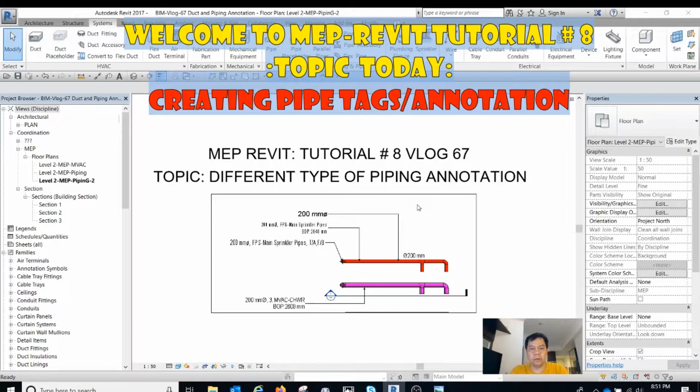My MEP tutorial is about the different types of piping annotation. This is tutorial number 8, and this becomes vlog number 67.

So this is my sample model for the piping, showing the different types of annotation.

First is the default annotation from Revit, and this is the modified piping annotation. I have 4 types: 1, 2, 3, and 4.

The first one is only the piping system. The second one is the piping system with the system type and the elevation.

The third one is only the piping with the annotations of to above and from below. And the last one is the annotations with the elevation including the pipe insulation.

This one is with insulation. Okay, let's start.

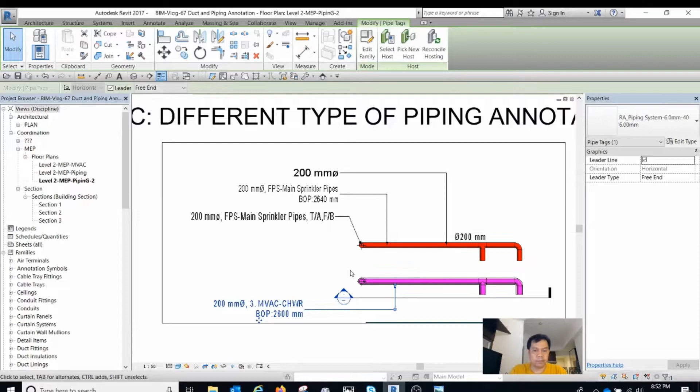We will use this piping model. This model is under the piping coloring system, already discussed in, I think, tutorial number 6 under vlog 65 or 64, I guess.

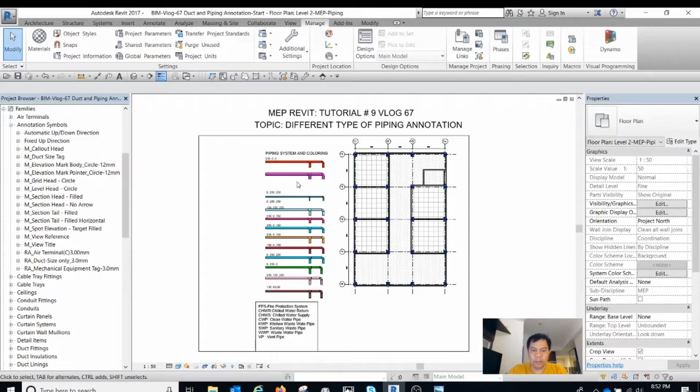And then this is our sample for creating the piping annotation. So in order to create the piping annotation, we will first create the floor plans for the piping annotation.

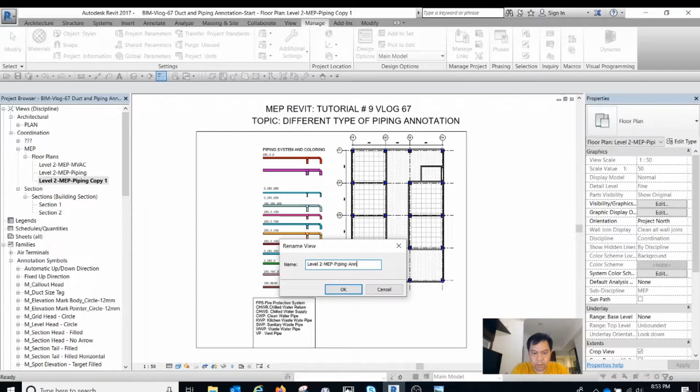Just duplicate with detailing, rename it, and do that from here. So we will delete this one.

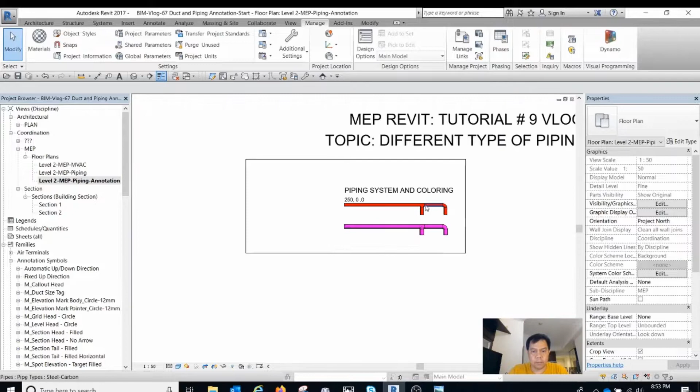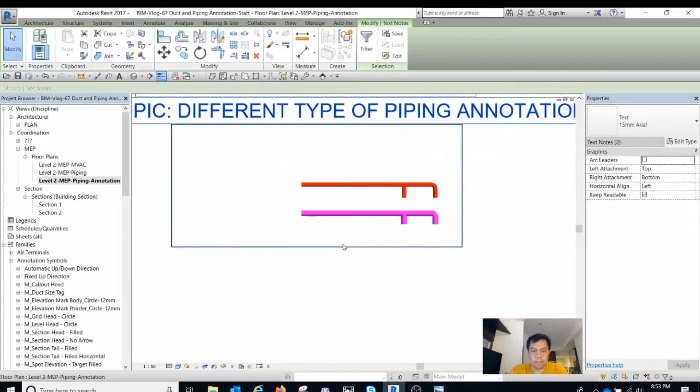Okay, let's start. Type TG to create the piping annotation. As you can see, if you type TG, there is no loaded annotation tag.

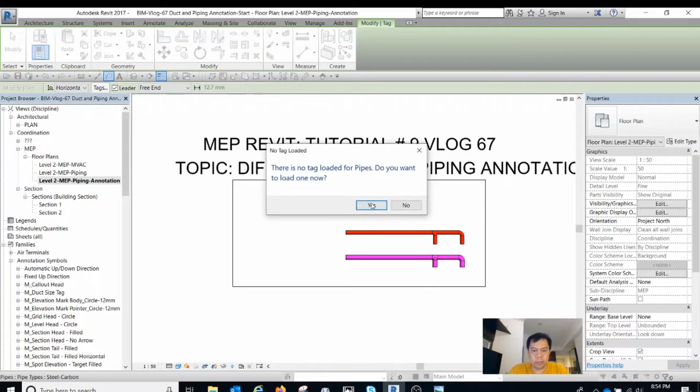So if we want to load the annotation tag, we will click yes, and then after that we will look for the metric annotation, look for the mechanical pipe size tag, and then it's okay already.

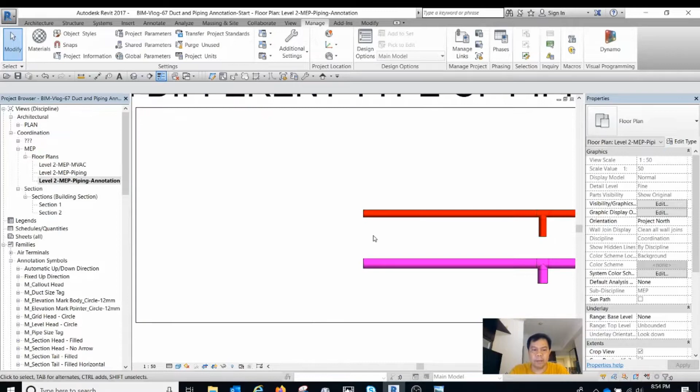Okay, since we already loaded the mechanical pipe tags, type TG again, and then pick from here to here. This is the default pipe size annotation, pipe size tag annotation. This is the default one.

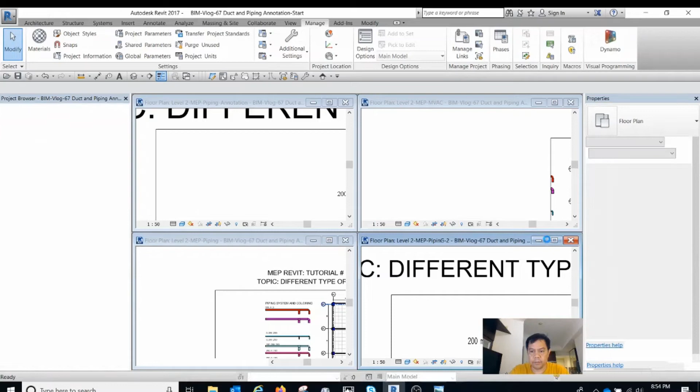We will modify this pipe size tag according to our text height. The text height is about 6 mm.

Here you can edit and modify this pipe size tag. Just click and then edit family, type VG, show the reference plane and reference line, click apply, okay.

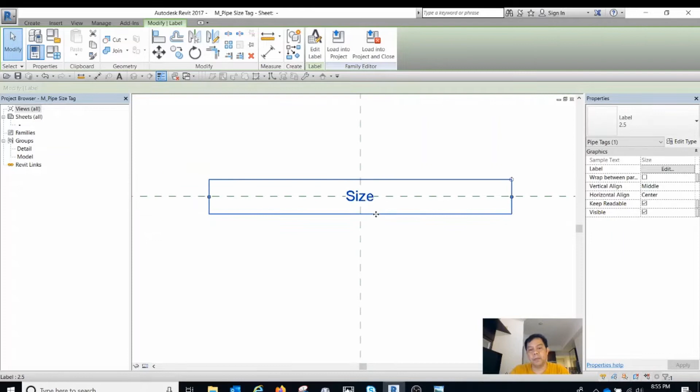We will first create the pipe with the bottom with the elevation from here, click and then edit. After that, click the diameter, one diameter, and then add parameters label. So it must bring up the system type.

Then the comments. The comment field is where you can input the description or additional information from the piping. Looking for the comments, okay here. And then bottom of pipe - I think we don't need the size parameter because we already have the diameter. If we choose the diameter, you can modify the size of the ducting, so we remove this one. But the bottom of pipe is missing here. We want the same like this, we want the bottom of pipe here.

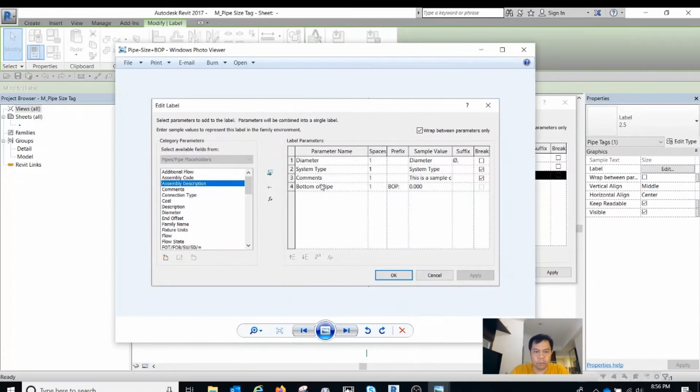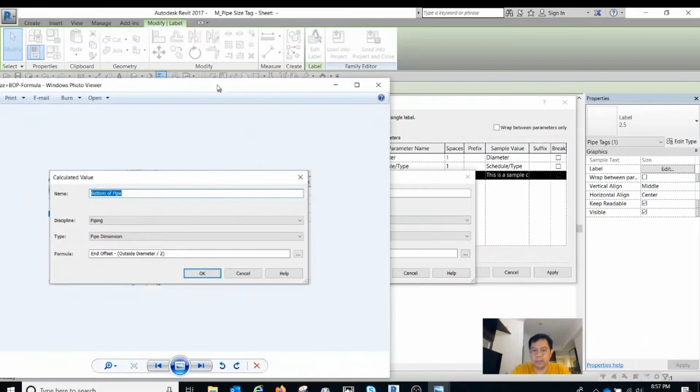But if you look for the category parameters, you cannot see the bottom of pipe. So we will create the bottom of pipe by clicking the add calculated parameter to label, just click, then bottom of pipe. This is very, very important. And then under the discipline, I have a sample here - the discipline is piping and the type is dimension. This is the formula, okay.

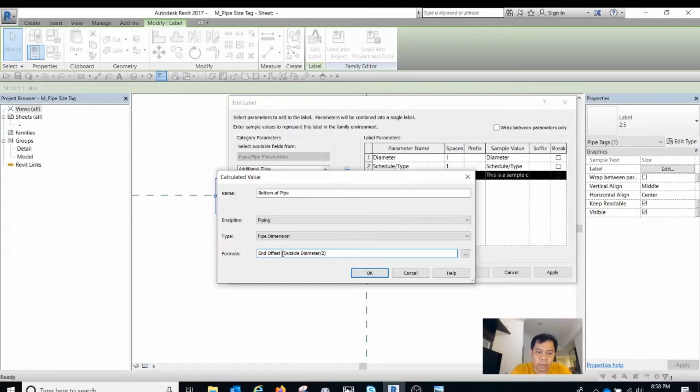So from the discipline type, choose piping, type choose pipe dimension, and then the formula is end offset, end offset minus outside diameter, divided by 2. This is the formula to create the bottom of pipe. Apply, okay, just okay, and then apply.

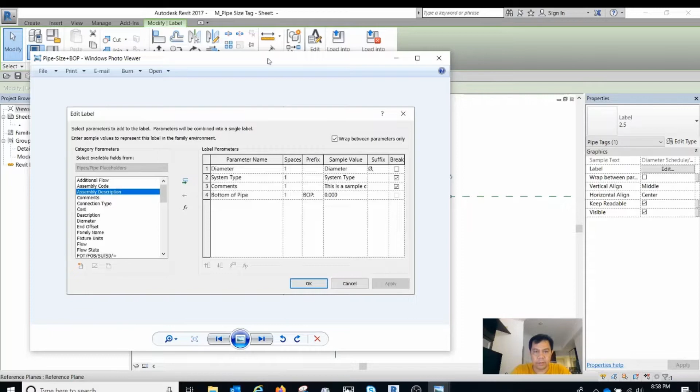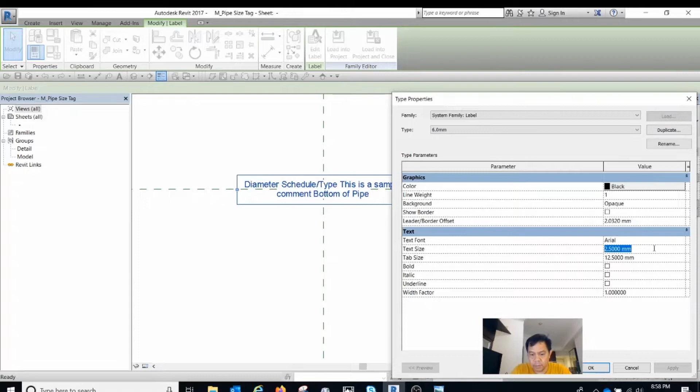Okay, now the type is like this, so we must create the arrangement. We will arrange the arrangements of the pipe according to - there is a break here, number 2 and number 3. So from here we will change the text height, must edit, duplicate, then 6.0, we will change into 6 mm. So 6 mm, usually Arial Narrow, and then the width factor 0.8.

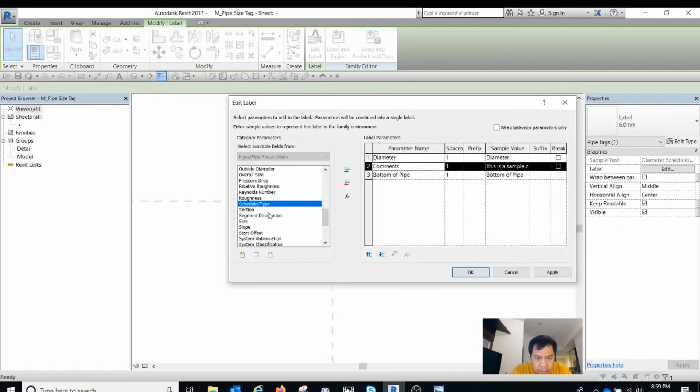Now the sample - so from this one we must break the system type and comments. So edit label, and then there is no system type here. It should be this one, system type. We will change the system type here, and then up here - diameter, system type, comments - and then check the system type and comments. Check the break. Apply, okay.

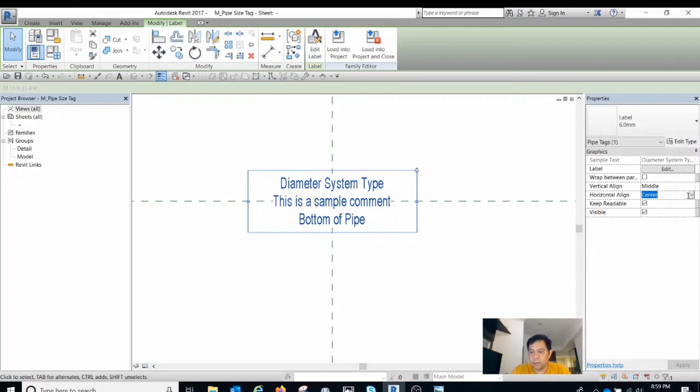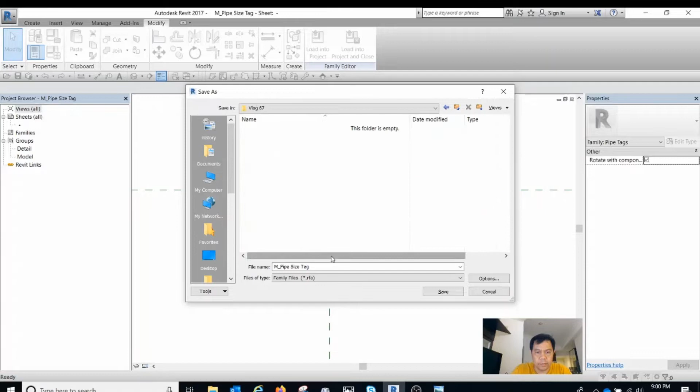After that we choose this one to left or right, I think we will use the right. Okay, after that, save as. I think this one, it's up to you what should be the file name. Then 6.0mm, option 1. Now we go, after that, load into the project.

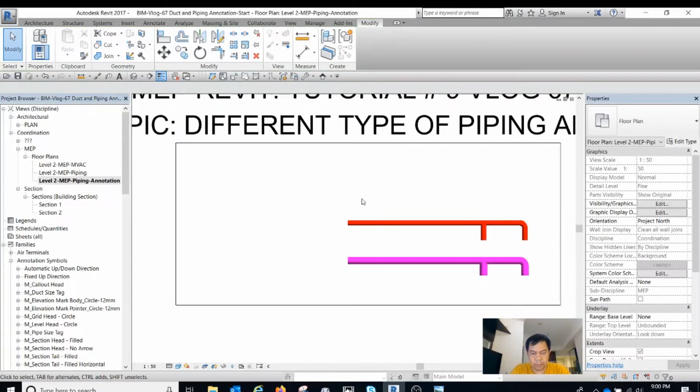Parameters here. It is already loaded, but our piping annotation from here - okay now type TG again. Sorry, type TG, and then from here to here. Now the piping system annotation is already complete, but there is a missing BOP here.

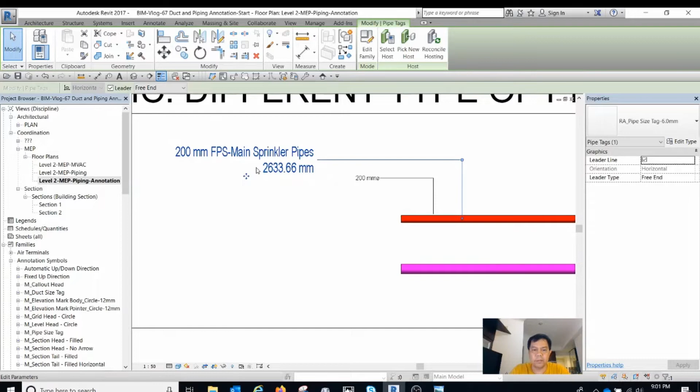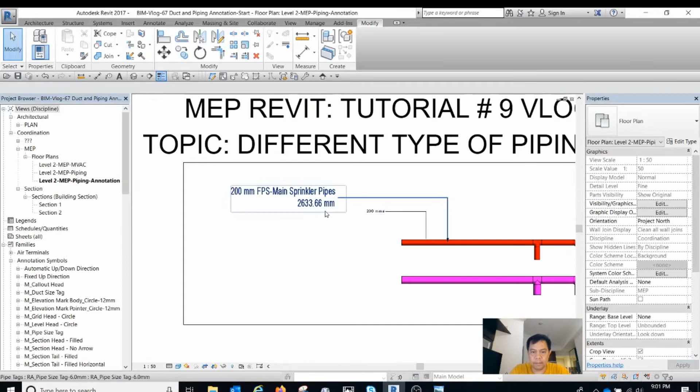But before we do that, we will add the arrowhead, 30 I guess. Okay, so in order to include the BOP, this one with the BOP, back again from here, edit family, edit label, and then we must add the BOP here, meaning bottom of pipe. Apply, and then from here again we must create this one for the diameter.

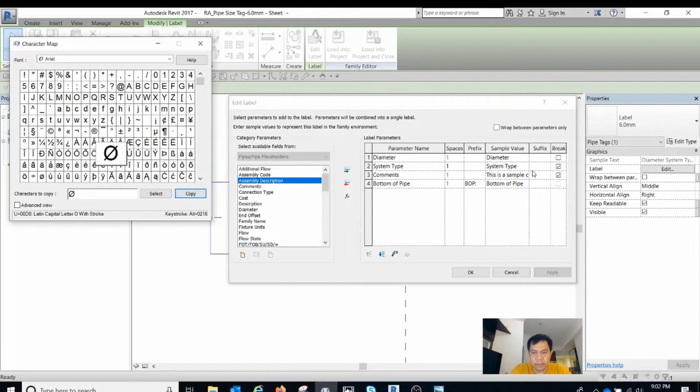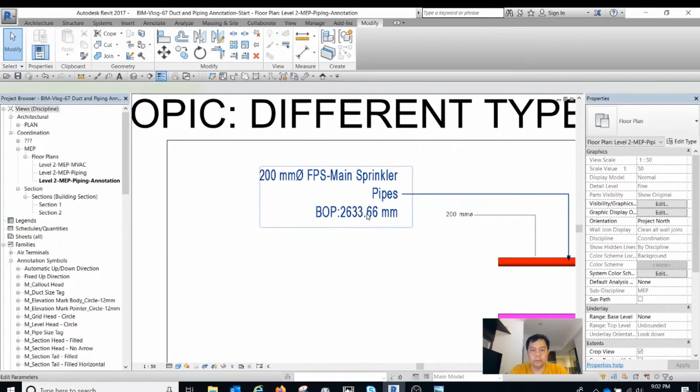So how to create the diameter? From the character map you can copy here, select, copy, and then Ctrl V. Okay, and then load into the project. Okay, I think we must arrange the - because this one is sprinkler, but the box is not properly arranged. From here, load again.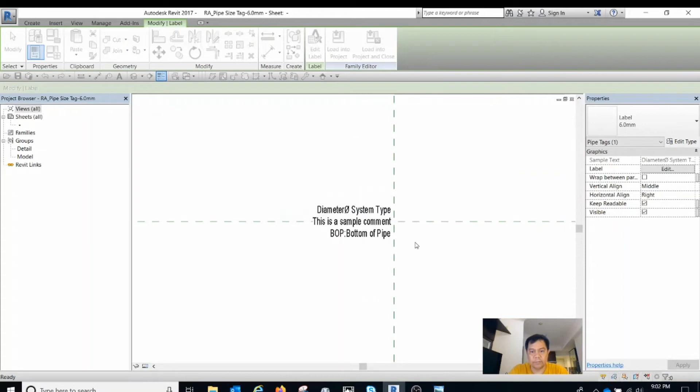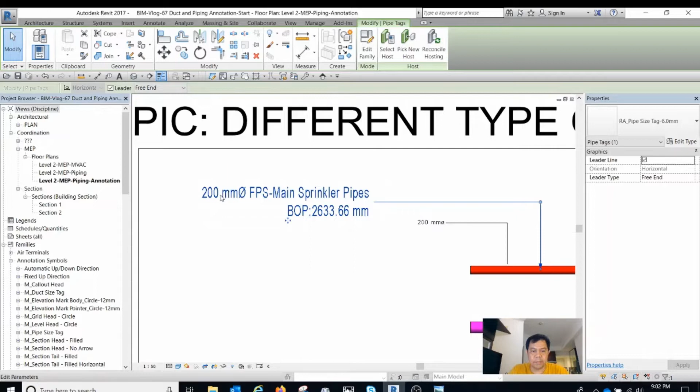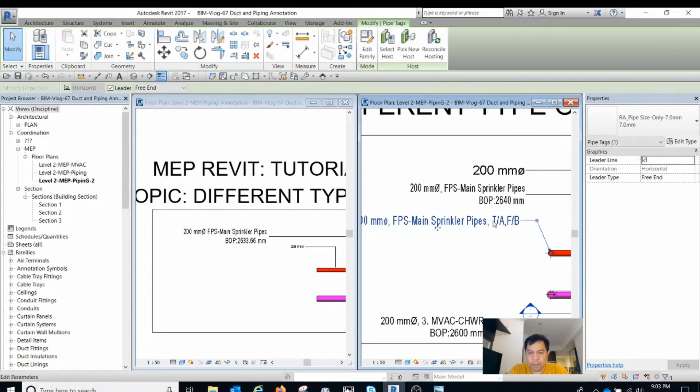Alright, oh see, now we have the bottom of pipe. This is the pipe size, and this is the system type with the BOP. So next is the bottom pipe size only - this one is only the pipe size. So we can now delete this thing, this is the default one.

Okay, from here again, edit family, and then save as first, family, and then this one is RA - it depends on you what is the file name. So this one we will make additional information, this one is pipe only.

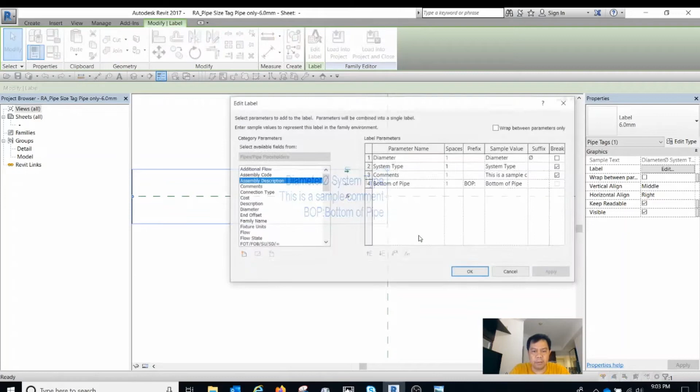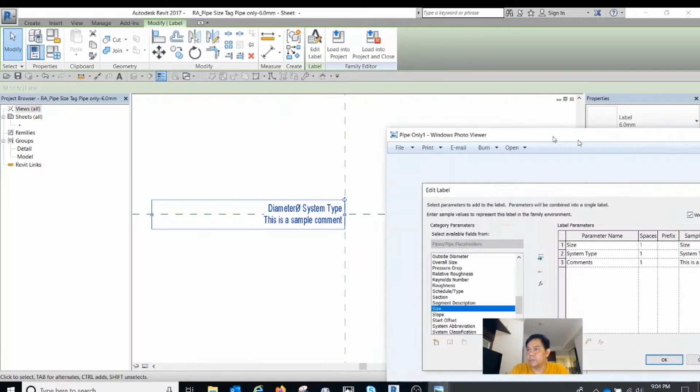Save. Since we need only the pipes, from edit label we remove this one because we want only the pipe size. So this is the parameters for the pipe size only - size, system type, and comments. Okay, and level, you put the comma here. Okay, load.

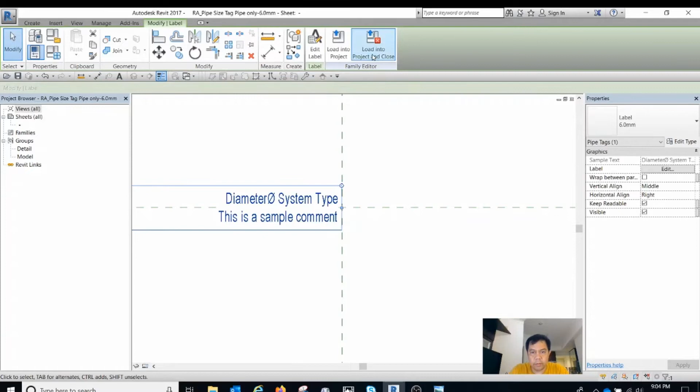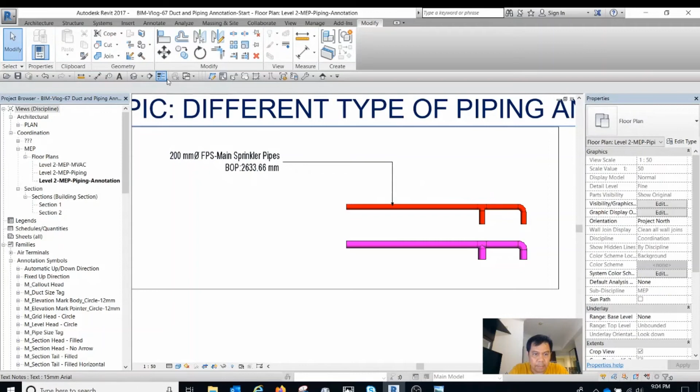So type TG again, but this is pipe size only, usually used in the riser. So since there is no riser here, we will create the piping here, riser. Make a section only, just to create the riser. From here - this type of piping with the elbow I already discussed in my previous vlog. Now we have the pipe riser here.

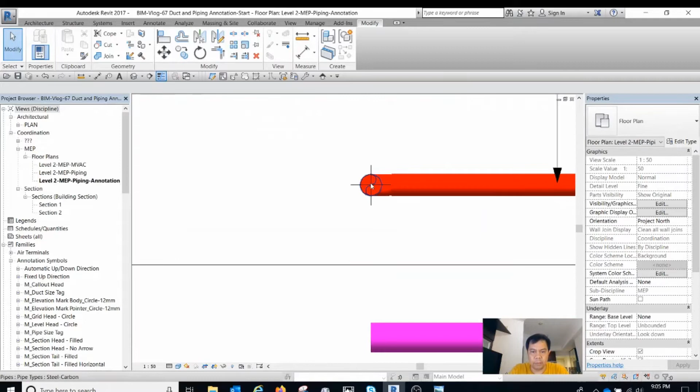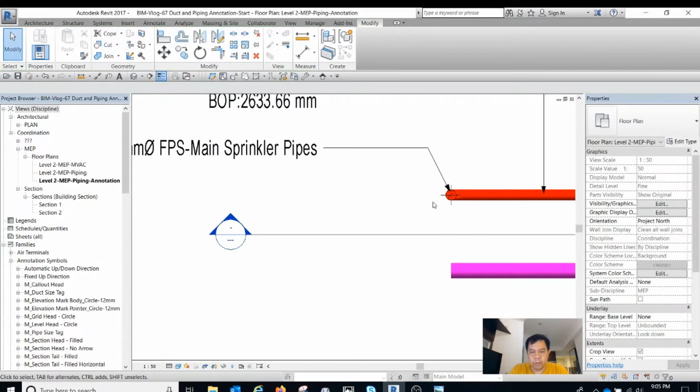Let's type TG again from here, and then edit type, and then the arrowhead must be 30. Apply, OK. Since this riser must be like to above from below.

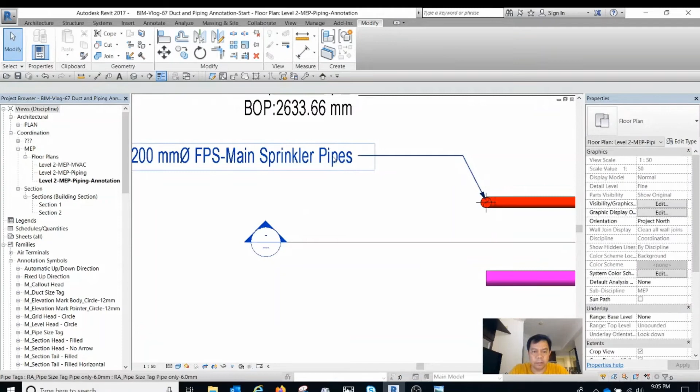To above, and then below is from below. So we will add the comments here. From here, just double click here, click only one time.

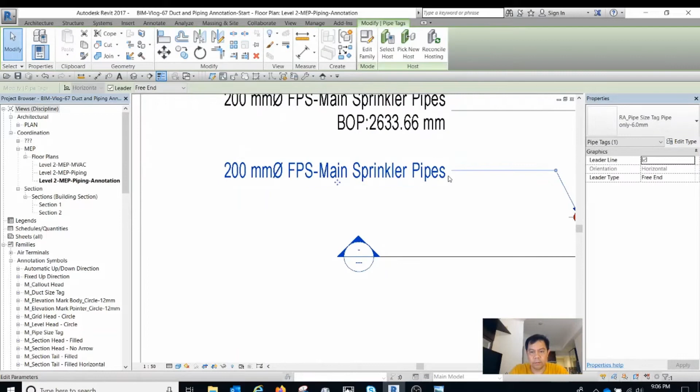Once you click this one, you can see the comments. You can type to above and from below, as simple as that. If you want these annotations, one line only.

Edit family. Go to the edit family. Just expand only the one, and then load again.

Never mind, I double check this one. I think there is no break here. I say one line only, should be like this.

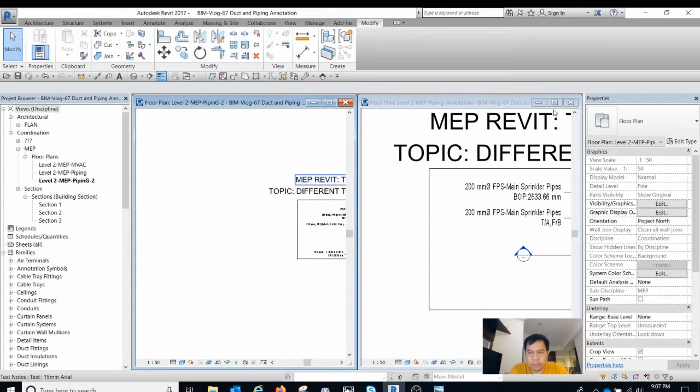Back to our model. Double click here. Edit family.

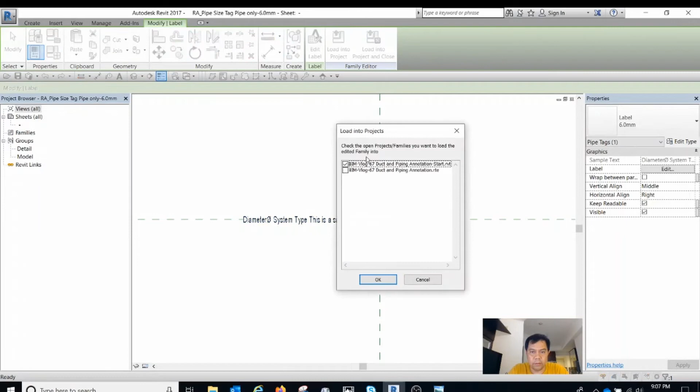Under edit label, uncheck this one. Become one line only, and then reload again. Override.

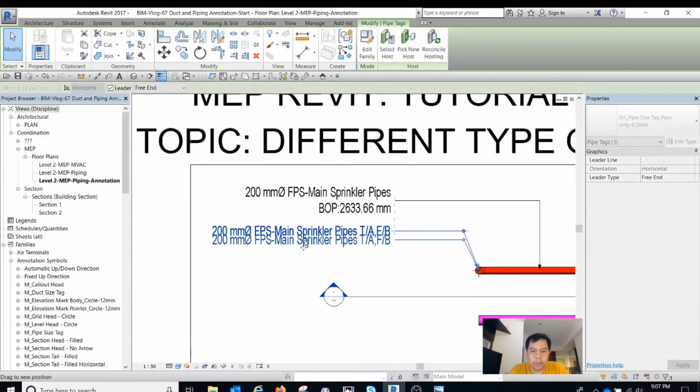That's it. This one is usually used for the pipe riser here, and this one used with the elevation. So another elevation here is with the insulation. You change only the transparency of the insulation, pipe insulation.

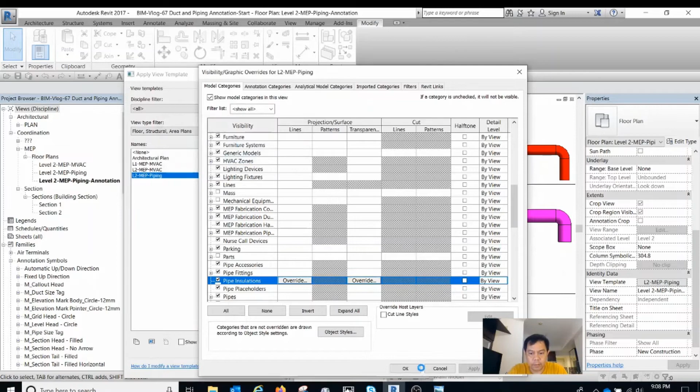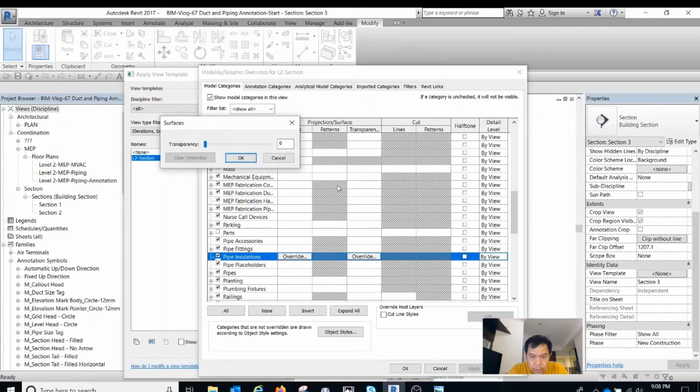Pipe insulation, I think must be 50%. Again the pipe insulation by 50%. Apply. Bring down.

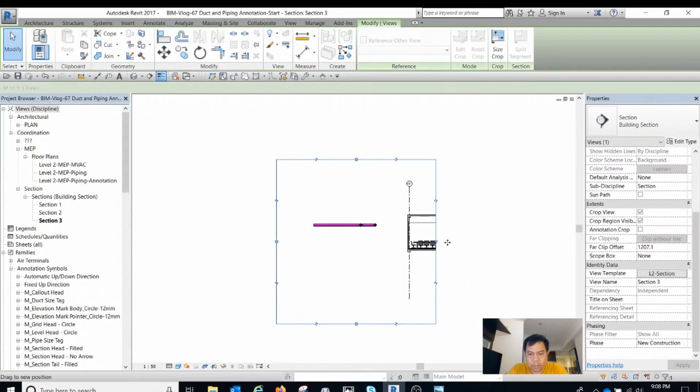With the pipe insulation here, and then, sorry, I make this section to create the elbow.

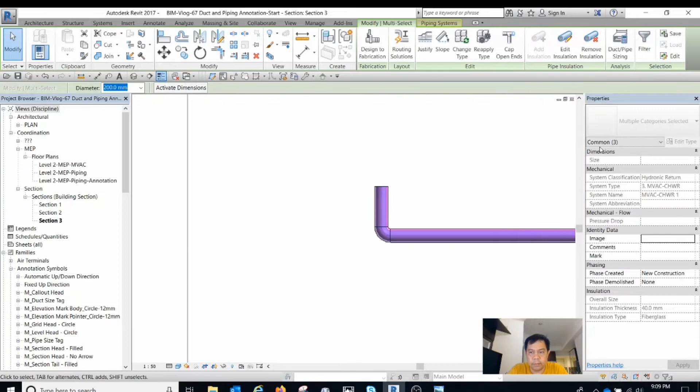Here again, add insulation, 40 mm. And then okay, for the pipe insulation.

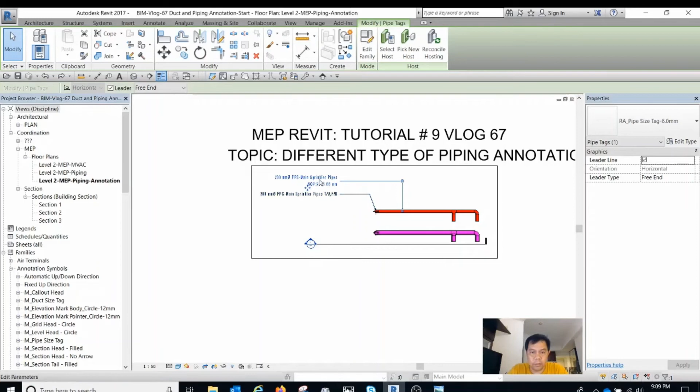Edit family again, and then save as. Make this one with the plus pipe insulation.

So under the parameters of pipe insulation, you will change the BOP formula from end offset minus outside diameter divided by 2, minus 40, because the thickness of the insulation is minus 40. This is with the insulation.

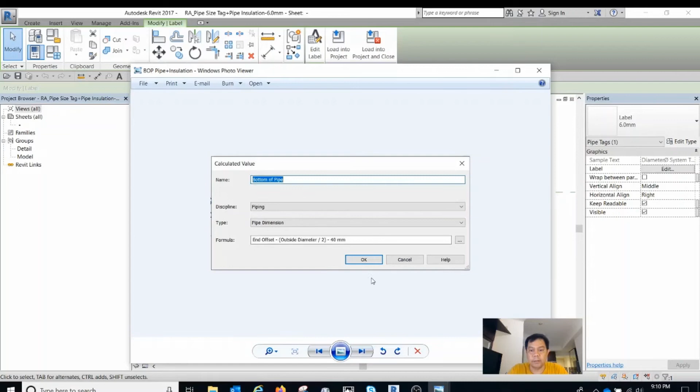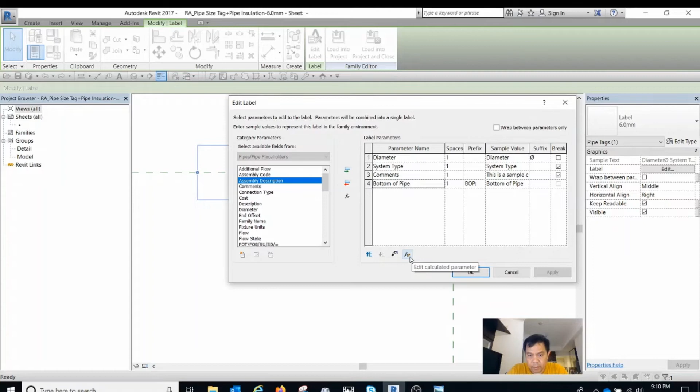Edit this one, edit again the label, then from the bottom of pipe, click the edit calculated parameter, and then we will change to end offset outside diameter. We will include the minus 40.

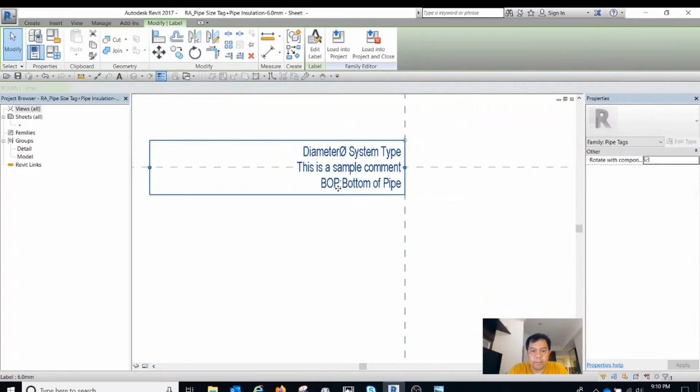Apply. Okay, after that we go to the, after we modify the bottom of pipe, I will double check bottom of pipe. Okay, minus 40.

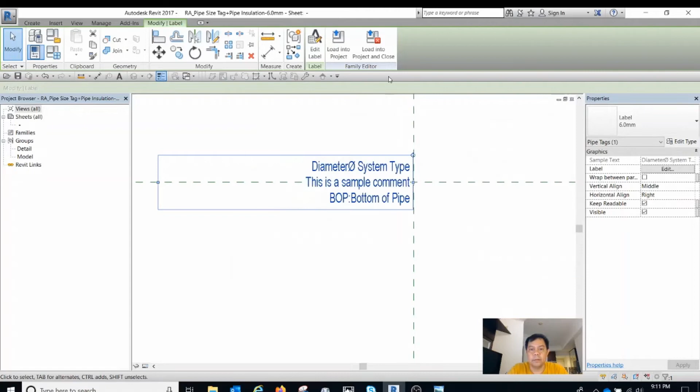Load into the family, go to the model. Now type TG again for the type TG. From here with the bottom of pipe.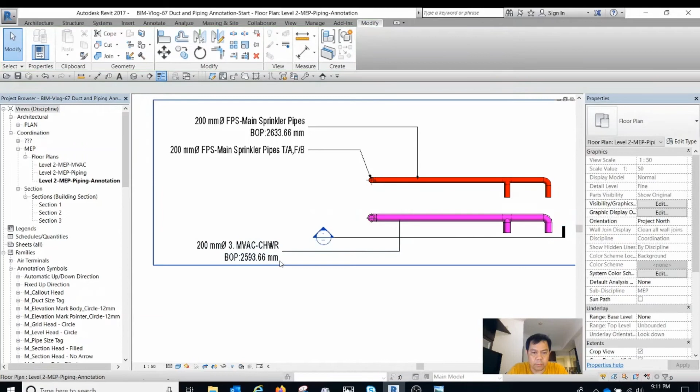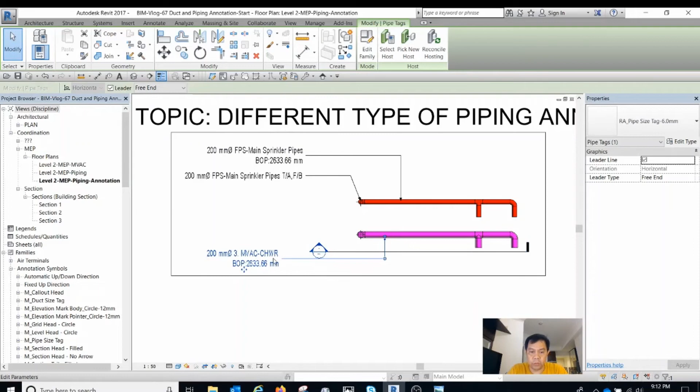Okay, this is the bottom of pipe for the insulation. Annotation for the piping with insulation. This is, see, the elevation is here. But if we will use the TG...

If we will use the pipe insulation only, see, this one is the pipe insulation. We correct this one.

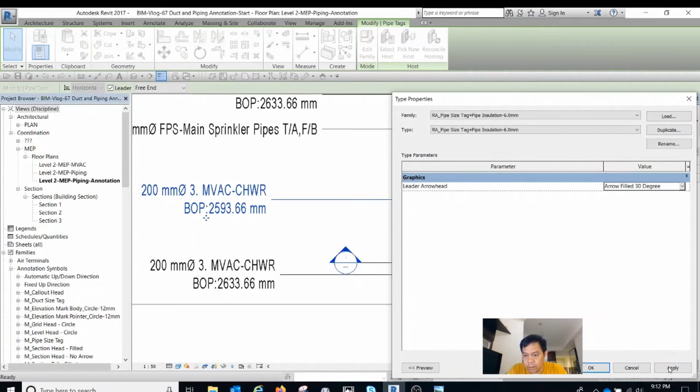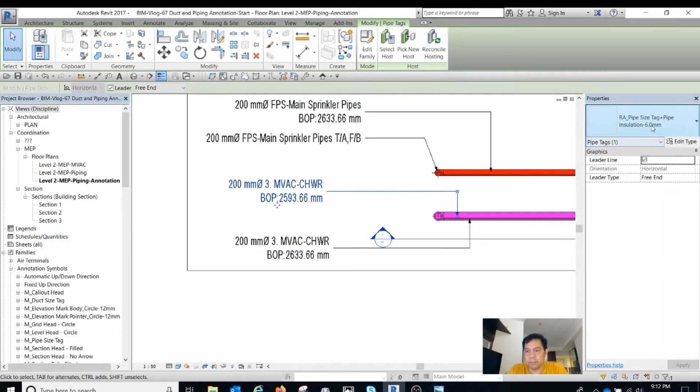Okay, I will show you the difference with the parameters of pipe insulation versus without pipe insulation. As you can see, this is a pipe size tag, but no insulation. This one is a pipe size tag with insulation, meaning the elevation is different.

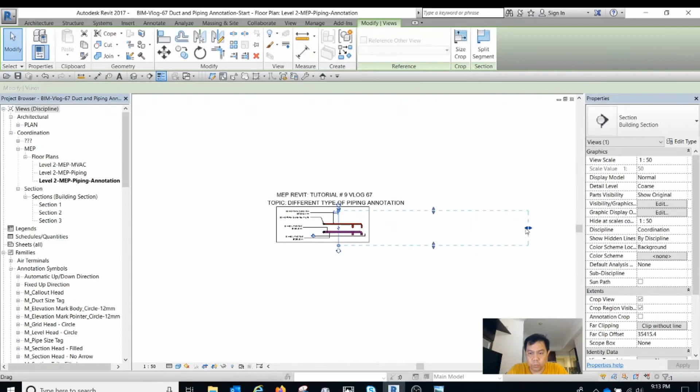Okay, so this is the elevation with the pipe insulation. From here...

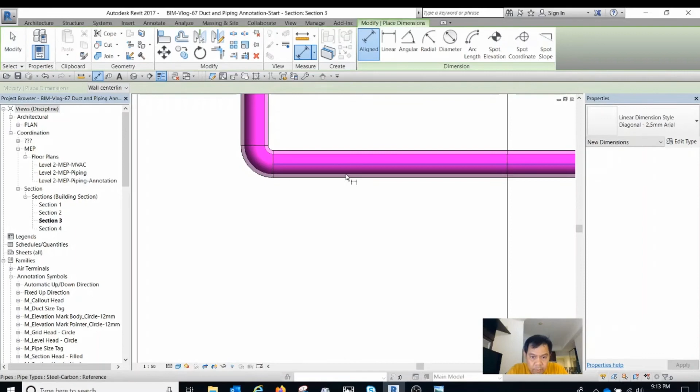We will try to make a dimension here from the bottom of the pipe with insulation, then type DI for the dimension, and then tab to go to the bottom of pipe with insulation, from here to here.

So this elevation is from the pipe insulation, while for the other pipes, type DI, and then tab from here. See, this is elevation for the piping without insulation.

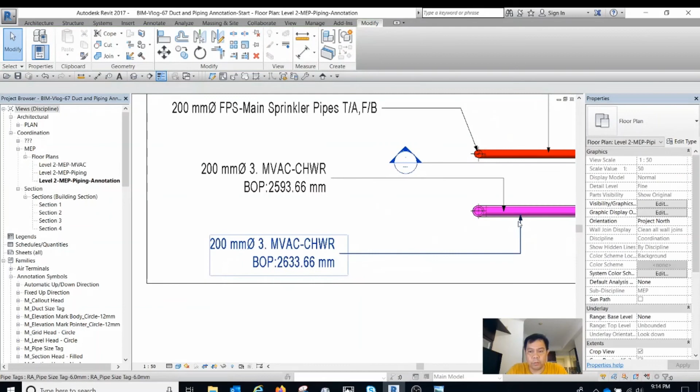So the elevation for the piping with insulation and without insulation is different. So take note the formula for the pipe insulation. This is the sample of parameters with the insulation, minus 40.

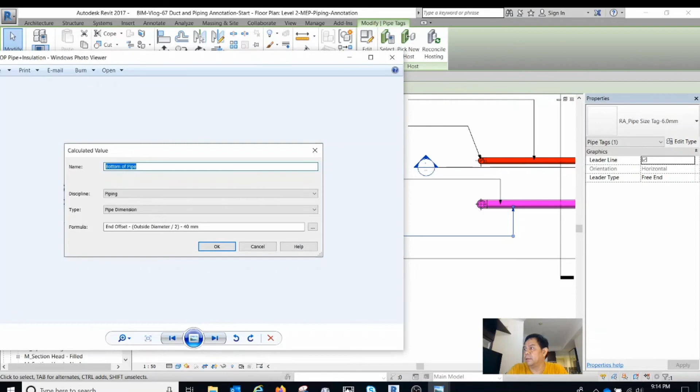Another one, make it bigger. Okay, so this one, see, this one is end offset minus outside diameter divided by 2, for the pipe elevation without insulation. Another formula is end offset minus outside diameter divided by 2, and then minus 40 for the piping with insulation. Take note these formulas.

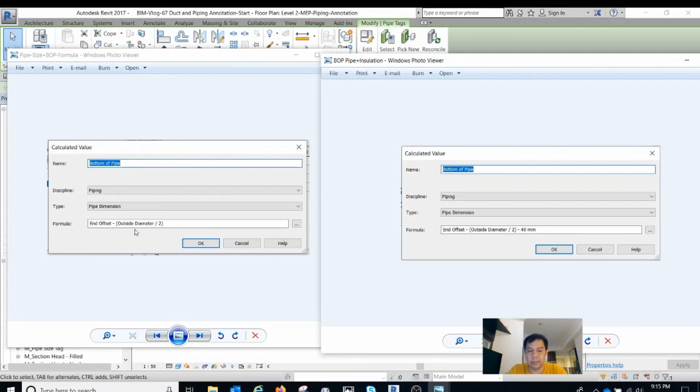That's all folks for the creation of the piping annotation. I hope you learned something from my video, but if you don't understand or if you are confused, you can download my video.

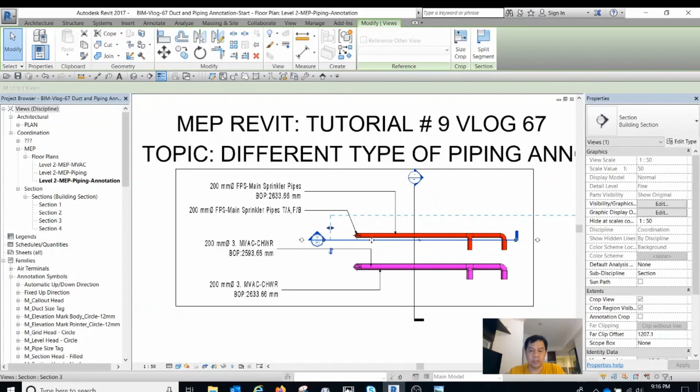Okay, that's it folks, I hope you learned something from me.